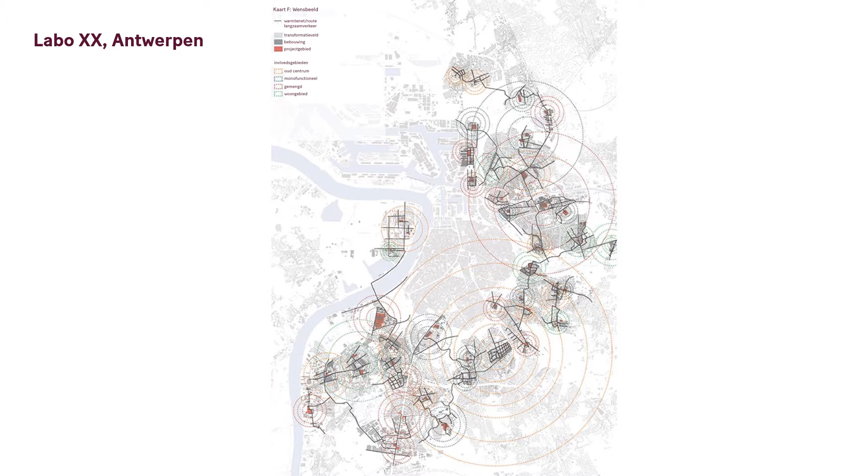Now in this presentation I will take you through 4 steps, trying to give our view and some insight on how we look at climate adaptation and mitigation in the context of city spatial planning.

I'll start with some explanation of the context of the way we work in our profession, and then go more into detail in some theory about mitigation and adaptation and examples of how that can be applied. Then focusing on the aspect of scales and how they interfere with these subjects, and closing off with inspiring examples and a view on how to deal with these things towards the future.

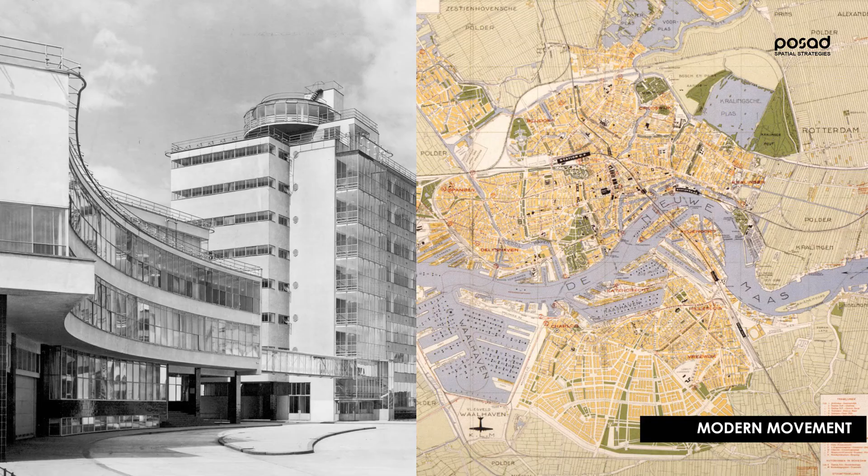Also a rise of modernism came. The modern movement changed architecture, but also changed urbanism. Thoughts of how people could live in light, lush environments, spacious, and also strictly zoned and regulated, gave cities new shapes, and factory sites became cleaner.

This picture is from the Van Nelle factory in Rotterdam. It's a beautiful place. I actually started my own career there in the architecture office that made the transformation of this building. It's now an office building again.

But this was a tobacco production, and it was really aimed at having a healthy and clean environment for their workforce. But also this company built housing and neighborhoods for their employees.

This was built in a very rapid phasing. So it looks very strict and rigid, but these were actually huge improvements for people living in the slums and in the degraded inner areas of the city.

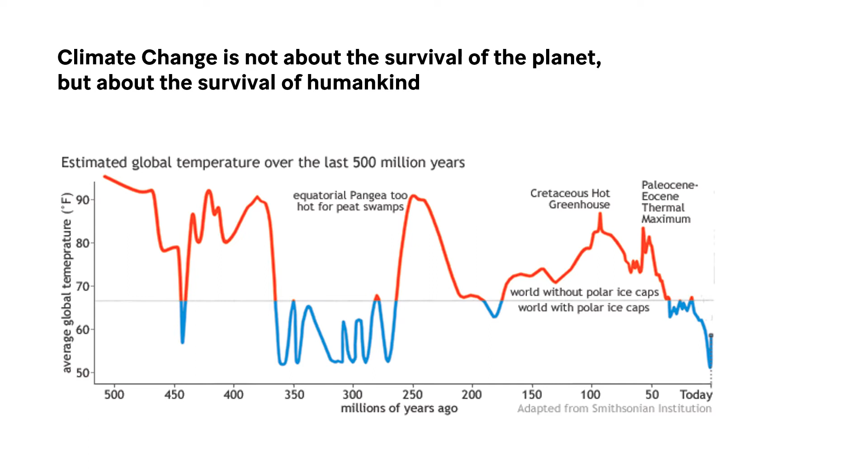Of course, the recent fast increase in temperature is also a threat to many species on the planet, but it is not necessarily a threat to the planet as such. It is more a threat to the survival of humankind. So this is not about the survival of the planet, it is about the survival of us, humans. And this requires a people-centric approach if we want to solve this.

There is this direct link between climate change impact and health. There's the direct link of flooding, which gives an increased risk of disease spreading. There is the risk of heat waves, which gives a higher risk among elderly and children of heat stroke and heat-related disorders, as we've seen in past very warm months. There's more air pollution with higher instances of asthma, cardiovascular diseases, and neurological diseases.

System collapse is also a very direct cause for health threats. When our energy systems, data systems, and mobility systems fail, this could lead to direct and indirect health threats regarding safety issues, but also in our health system.

One of the obvious effects of the systems on the living environment is that over decades, layers were added to the city of traffic, sewage, and data, all this while space was being reduced for people and nature. The division in layers and silos to cope with the growing complexity of our cities is a result of it. So these solutions today, funnily enough, lie in bringing it all back together again.

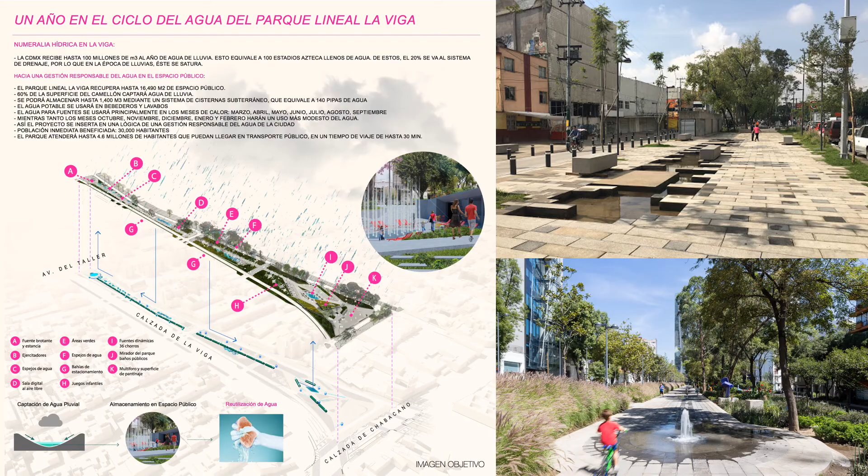Parque Lineal La Viga is one of the great examples of how Mexico City uses an adaptation strategy to also stimulate a behavior change that leads to mitigation. The long parks that are placed in the center of the city and the dense neighborhoods give lush green areas to people and also make them aware of a change in their life they can make. People start living more healthy, but they also start moving with a friendlier CO2 footprint.

More and more we see these structures grow into complete systems, changing the inherent structure of the city, the behavior of the inhabitants, and the systems of the city.

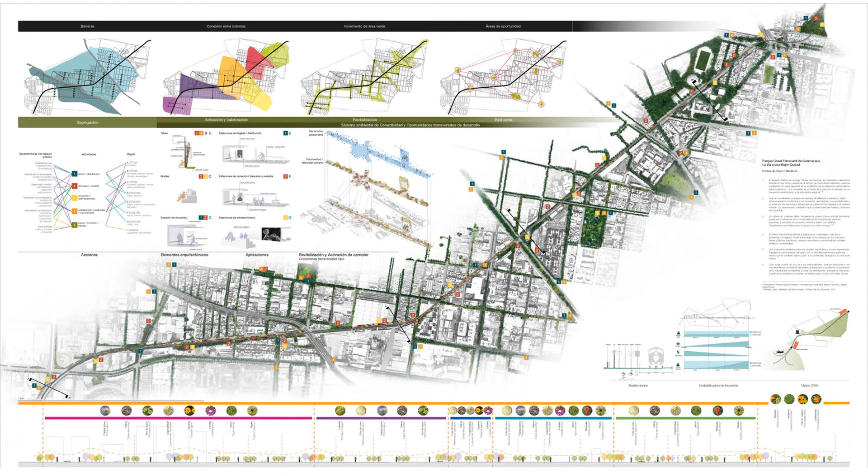Moreover, living in a city on its own is already a more sustainable way of living, having proximity of functions and less need to travel, and also combining collective energy for everything people need in their life. Also, specific mitigation involves the energy transition.

Now, when we look at adaptation, it often involves changing the city systems, like sewage, waste, and energy. Nearly all adaptation measures also have spatial implications, and these spatial implications change the systems and the space of the city, resulting often in a change of people's behavior. And this comes back to reducing emissions, reducing waste, and circular cities. So this is the loop we can make between adaptation and mitigation, and how they can go hand in hand as the two sides of the coin.

The next part of my presentation focuses on these differences in scales and how we need to play in between those scales in order to get the maximum effect of the attempts we make.

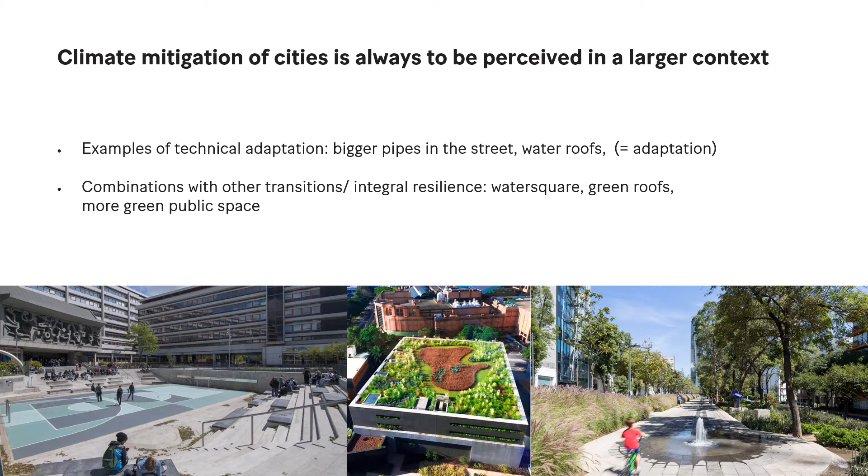But when you have taken care of your zero emission, your water recycling, your super strong building, then the whole region floods and essential services break down, as happened in 2005 when Katrina hit New Orleans.

So does that mean it is useless to focus on an object level? Well, yes and no. Every well-meant change anyone can make is a positive one, because challenges are so huge. On the other hand, because the challenges are so huge, we need to focus on all the efforts in a clever and systematic way. This means acting at multiple scale levels and playing between the lines.

We believe the scales in between the neighborhood and the region are crucial in tackling challenges and moving to integral strategies for mitigation and resilience.

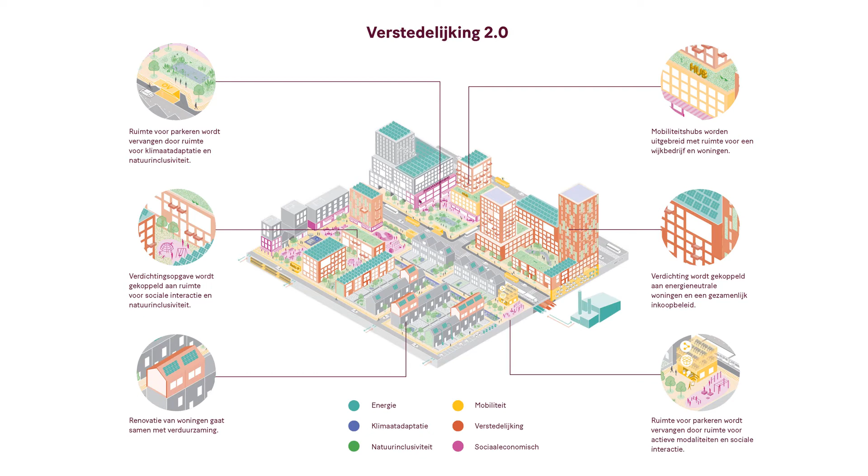Using the method of research by design, we show different ways of adapting a neighborhood and transforming it based on a different transition coming into play as the leading transition. In this case, showing how urbanization and densification can be the driver.

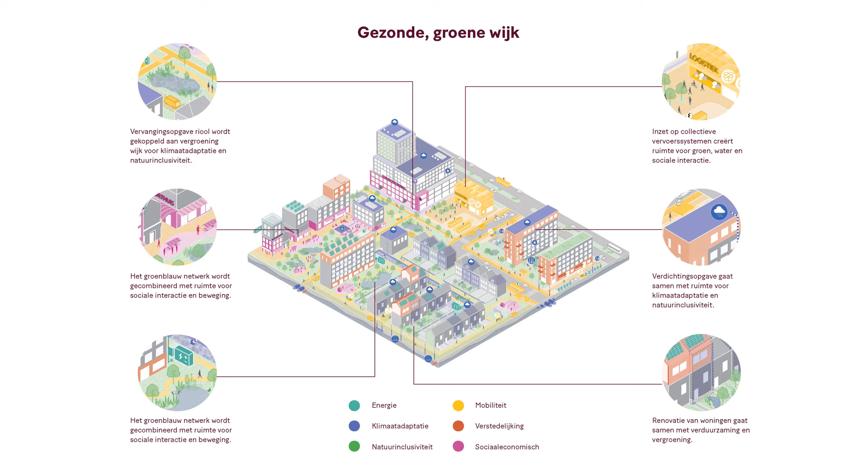Or in this case, how sustainability in a centralized or decentralized way can be the main driver of transforming the neighborhood, whilst taking into account also the other transitions on health and densification.

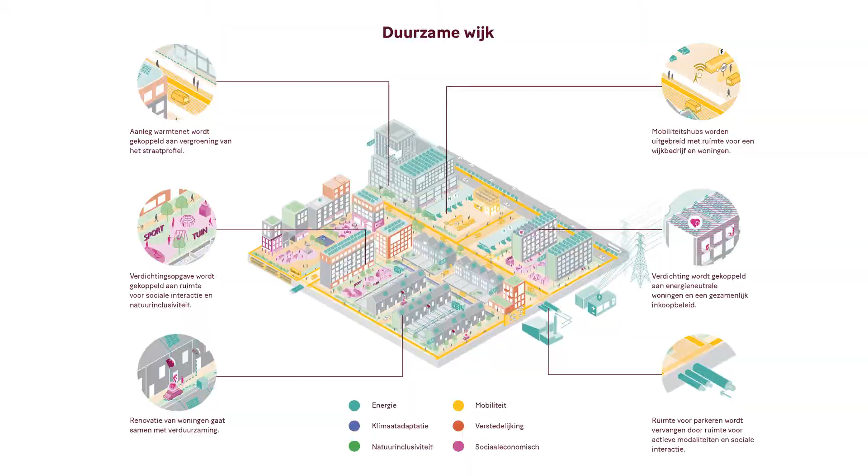To make this change happen, systems like the mobility system need to change as well. And fortunately, technology is there to lend a hand. Smart mobility is the term used for all innovation, both low and high tech, that enables us to move in different ways.

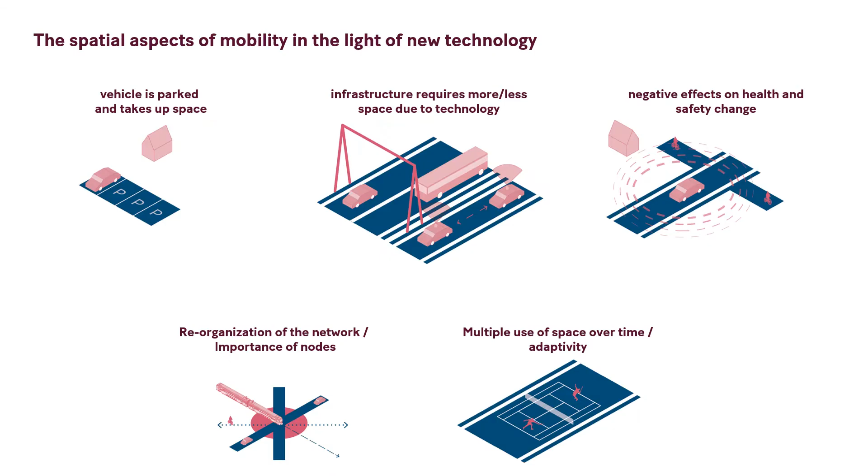As Posad Maxwan, we are engaged in several lines of research that aim to uncover the spatial impact of smart mobility.

Not only does this reshape neighborhoods, but it affects the whole mobility network of the city and the connected regional daily urban system with it.

Often smart mobility is perceived as an issue of mobility and an opportunity to make the mobility system more efficient. But in fact, aspects as livability of urban areas and reorganizing space to free up the much needed space for the city's resilience is a stronger driver for change. New ways of looking at mobility come into play, like moving slower but more pleasant, more healthy and more inclusive.

To illustrate this, I want to briefly go into a project that we did for the city of Amsterdam, focusing on the mobility system of Strandeiland. It is an island with a new residential neighborhood, including a facility center at the beginning of the island.

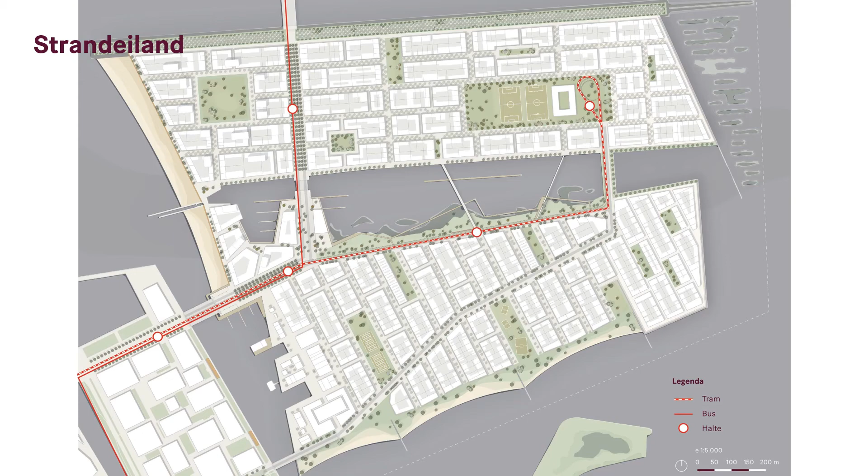The question of our client was how to have the most suitable implementation of mobility hubs. The original idea was to make this a zero-emission island, leading to the need to collect all non-zero emission cars at the beginning of the island in a giant hub.

So that is what we did together with Arcadis and Deloitte. We tested several options of spreading this system, varying from parking hubs to hubs where you only have shared mobility, eventually also leading to a concept of what we call the street hub.

Different scales were implemented, lots of small hubs or a few larger ones. We tested all the options, looked at them from a cost perspective, a mobility system perspective, and a spatial implementation perspective. And in the end, the most fitting with the idea behind the original plan of Strandeiland was this idea of the community hubs.

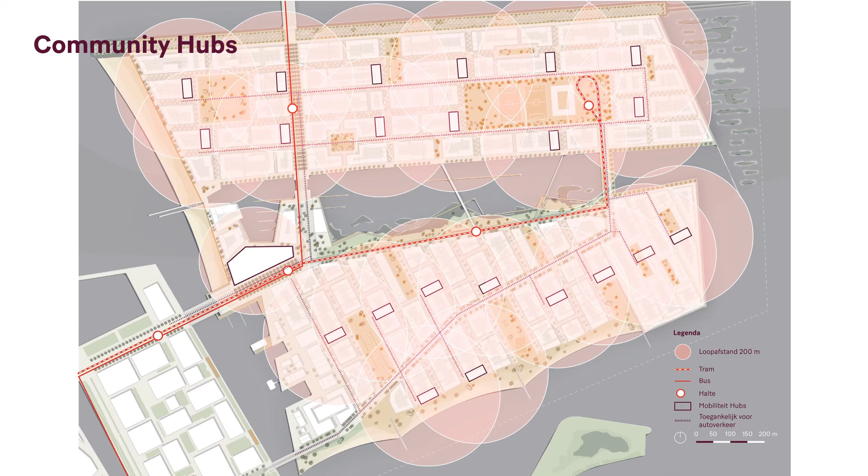Now this is what these community hubs could look like, implemented in the neighborhood, a place of interaction where people arrive and start their day or start their journey. The plan was to combine these with local functions and local amenities.

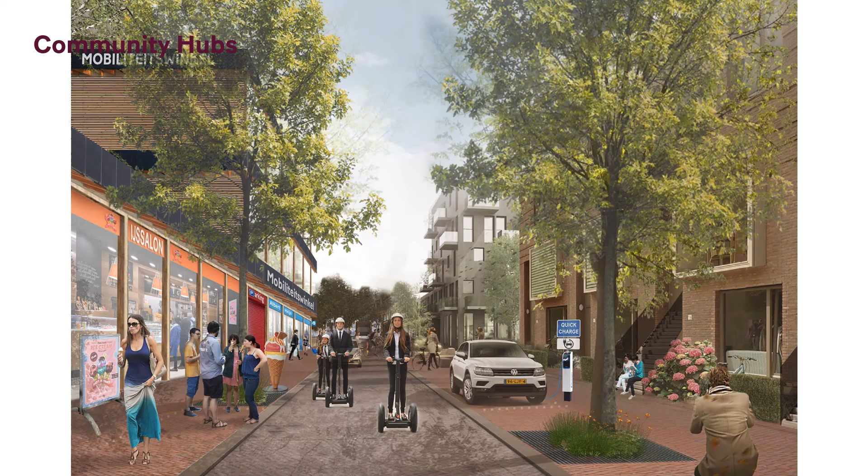Specifically, this aspect was the part that the city of Amsterdam really liked. And they chose this concept because of this possibility of the engagement of the inhabitants.

Space defines how people can act, and people's behavior or life patterns influence how they use and adapt space. For mitigation and resilience, we need both people to change behavior as well as change the spatial context they are placed in. To change behavior and create buy-in from communities, we need an increased focus on the people whose behavior we're trying to change.

There is a clear revival of citizen participation in urban design, from grassroots initiatives to active budget planning and design by entire communities through participatory budgeting.

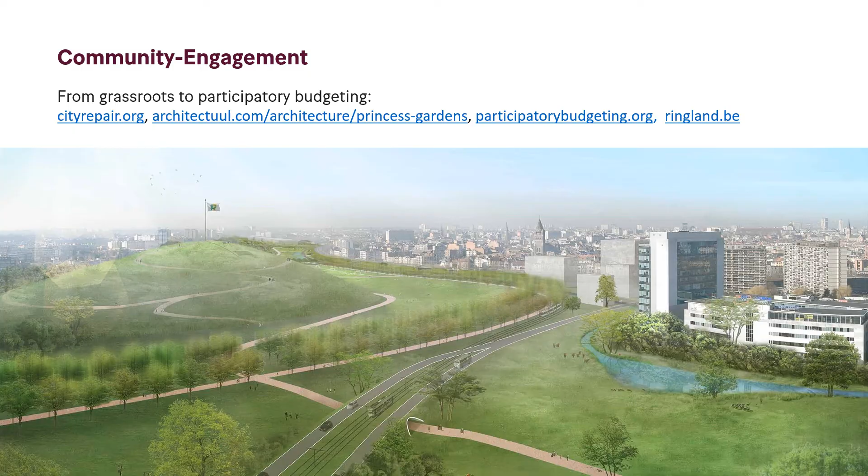As cities are looking for a more resilient future, they try to look at it in a very integrated way. For the city of Rotterdam, we made their vision for the future, looking at the complete perspective of a circular, compact, productive, inclusive, and healthy city. The question was, what kind of city does Rotterdam want to be? Well, it wants to be all of these cities.

Dealing with climate change, health impact for their inhabitants, but also equality, equal chances in a strong economy. The five future perspectives for the city of Rotterdam were envisioned from a neighborhood level to a regional level, and they all give together direction to the future of Rotterdam.

Namely, the compact city, where densification and greenification go hand in hand; the inclusive city with mixed neighborhoods and space to meet and to participate; the productive city that takes into play international trends and offers space to innovation in the making industry; a healthy city with cleaner air, smart solutions for climate adaptation, and spatial implementation that invites movement; and finally the circular city, with space for recycling and for production of renewable energy.

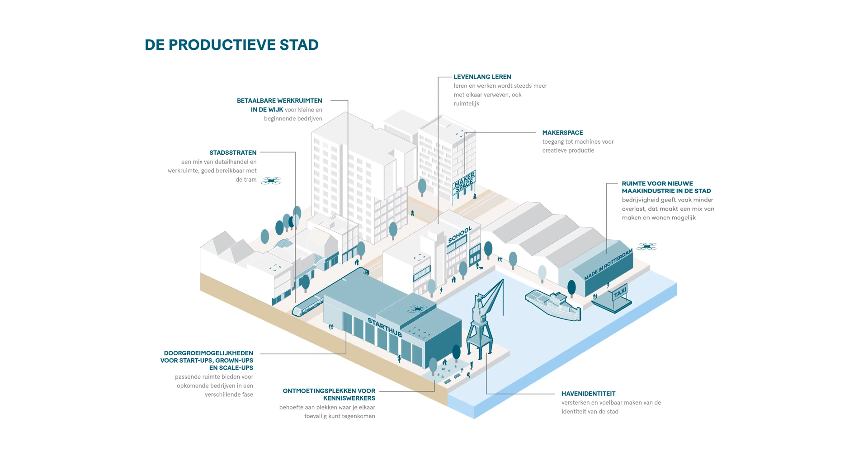These perspectives are not meant as different choices. Their force is in integrating them. They are like a compass for civil servants to act on, for politicians to determine their future policy on, and for people with initiatives in projects to act on. They provide the flexibility to implement new ideas and developments for the city of Rotterdam.

Another example of working between scales can be found in the work we do on regional development strategy, like this one for the Green Metropolitan Region of Arnhem-Nijmegen Food Valley, taking resilience and mitigation as a starting point. The inherent value of the existing natural areas and green and blue networks, both in and outside the cities, are a key element in this strategy.

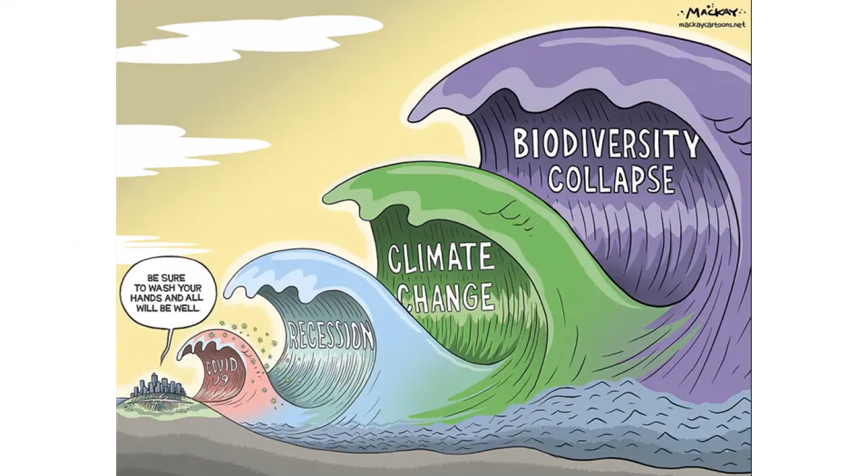And rightfully so, because there is a bigger wave coming, and it is not only threatening humankind. The biggest wave of ecosystem collapse is one of the major challenges that fits in well with the interventions here. A good link with health as well, for what is good for our ecosystem is good for our health and well-being.

This brings me to the final part of my lecture, showing some inspiring examples from recent history and how we can translate them into sustainable strategies for the future of our cities.

Now, what are these good examples? Well, the garden city that I started with shows that it has spatially more of a natural connection. But does it function as nature, and does the human ecosystem really benefit? Well, no, because functions are still very separated and the zoning is strict.

Examples that are really successful are the pre-war mixed neighborhoods, creating an ecosystem of activities and destinations in proximity, leading to prosperous economic centers. The downside is the lack of green and open space due to the neighborhood setup. Often this was conceived with other intentions than people's health or connection to nature.